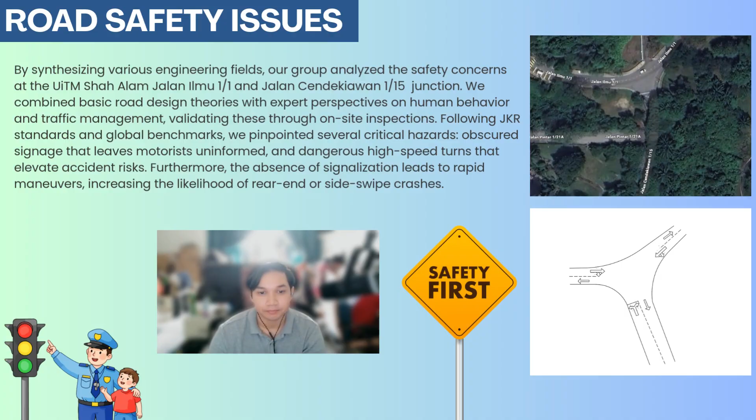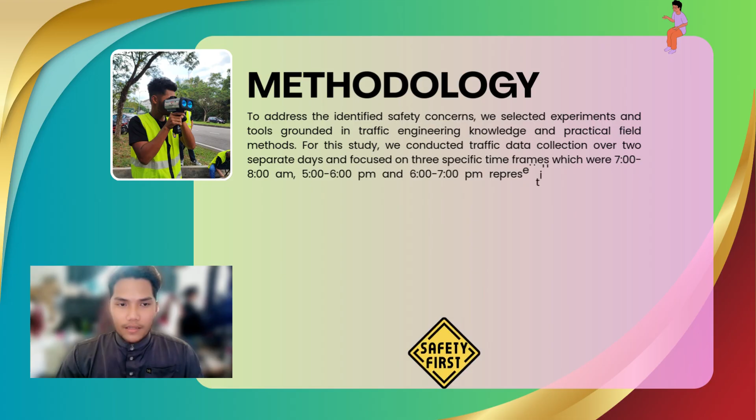Next, I will continue with the methodology of the experiment. To address the identified safety concerns, we selected experiments and tools grounded in traffic engineering knowledge and practical field methods. For this study, we conducted traffic data collection over 2 separate days and focused on 3 specific time frames, which were 7 a.m. until 8 a.m., 5 p.m. until 6 p.m., and 6 p.m. until 7 p.m., representing morning peak, evening peak, and night condition.

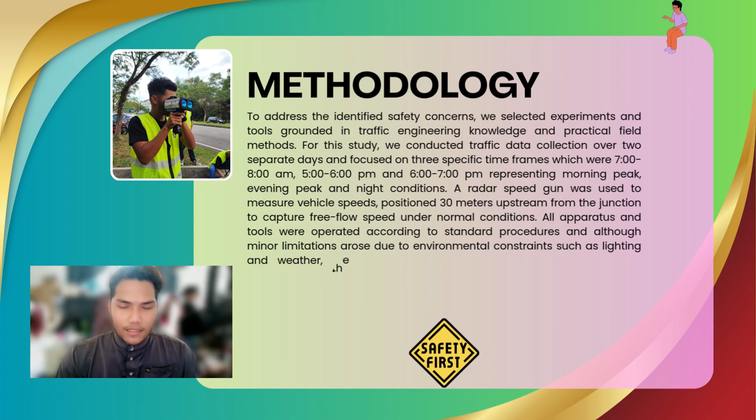A radar speed gun was used to measure vehicle speeds, positioned 30 meters upstream from the junction to capture free flow speed under normal conditions. All the apparatus and tools were operated according to the standard procedures, and although minor limitations arose due to environmental constraints such as lighting and weather, the majority of the data collection followed proper methodology. Our tool selection was based on established engineering practices and supporting literature, and the resulting data was deemed reliable for further analysis and drawing valid conclusions.

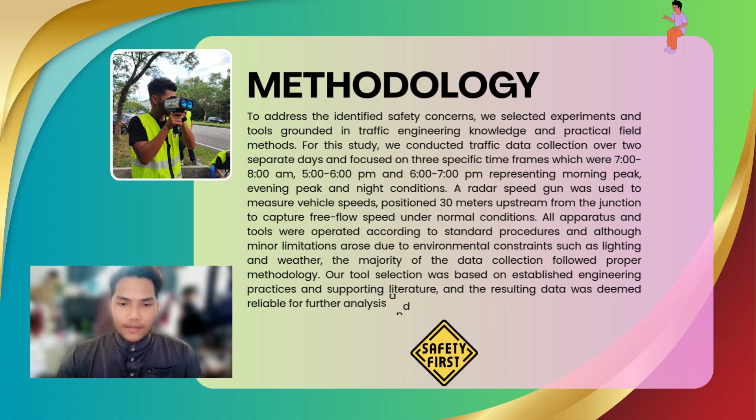For this study, we conducted traffic data collection over 2 separate days, focusing on 3 specific time frames: 7 to 8 a.m. morning peak, 5 to 6 p.m. evening peak, and 6 to 7 night condition. For the morning peak, we get an average speed of 23.9 kilometers per hour. Evening peak, we get an average speed of 25.56 km per hour, and night peak average speed of 25.29 km per hour. So the total average speed is 25 km per hour.

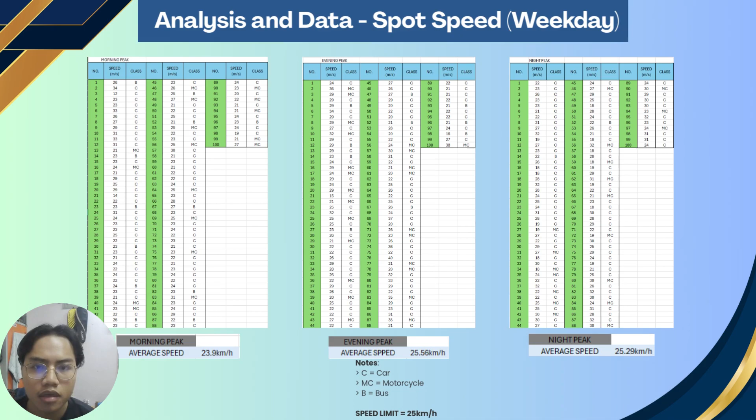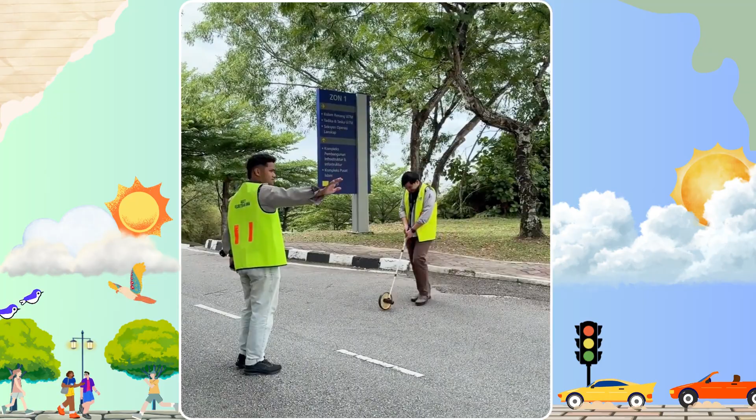We have chosen a T-junction road at Bukit Tonggak. Without a traffic signal, the crossroad becomes a place of high confusion, with vehicles from all directions competing for right of way, increasing the probability of rear-end and angle crashes. Each lane will be measured using a proper measuring wheel to meet the JKR geometric design standard, to ensure the safety of the road using proper material. This is to ensure the safety and efficiency of traffic flow.

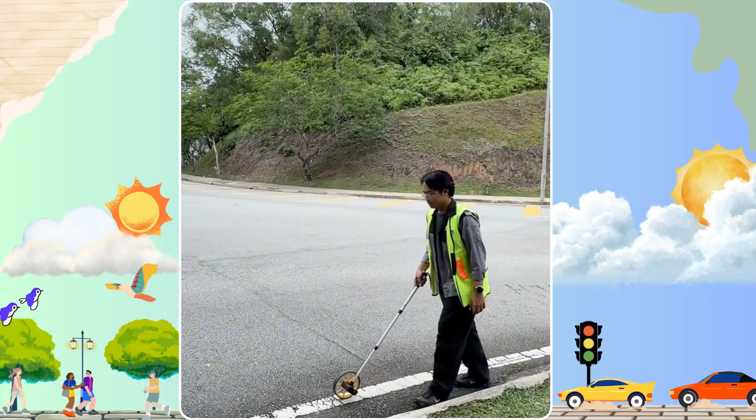We observe there is no zebra crossing line to cross the road. So we decided that we need to create a zebra crossing line on the road to ensure the safety of pedestrians crossing the road. The zebra crossing line should be placed a few meters from the intersection point. This allows pedestrians to walk safely across the road using the zebra crossing line, following the JKR standard. This is following a minimum setback of 5 meters from the corner.

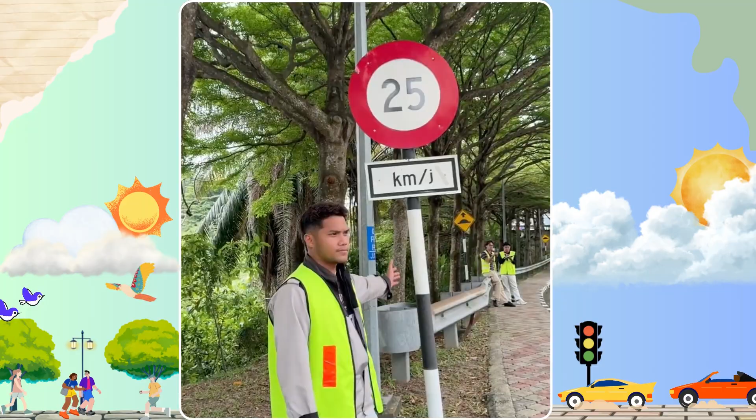We observe there is a speed limit at the junction, and there is also a slope sign to slow down vehicles along the junction. There is also a slippery road warning sign to ensure the safety of vehicles using the junction, so it is good for warning vehicles using the road.

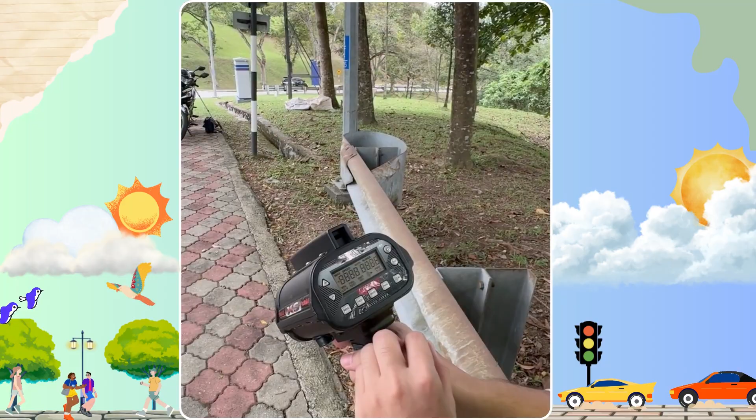For this study, we conducted traffic data collection over 2 separate days, focusing on 3 specific times: 7 to 8 a.m. morning peak, 5 to 6 p.m. evening peak, and 6 to 7 night condition. A radar speed gun was used to measure vehicle speed, positioned 30 meters upstream from the junction. For traffic volume and classification, we use a manual tally counter to record the number and type of vehicles at 15-minute intervals. This allows us to observe traffic flow fluctuation and analyze speed sub-intervals. Our data collection followed proper methodology, making the results reliable for analysis.

So next we will go to the mitigation part. Based on field observation and speed data collected at the junction of Jalan Ilmu 1/1 and Jalan Cendekia 1/15, several mitigation measures are proposed in accordance with JKR Arahan Teknik Jalan to improve road safety.

So first we'll go to the speeding. Although the speed limit is 25 kilometers per hour, observed evening and night speeds slightly exceeded this value. Speed calming measures such as rumble strips and repeated speed limit signage are recommended to reduce approach speeds.

Next is the alignment. The road alignment allows high-speed turning movements. Chevron signs and clearer edge lines are proposed to improve driver guidance and reduce loss of control risk. Next is the cross-section. The lack of clear road edge definition may encourage faster driving. Painted shoulders and edge markings are recommended to improve lane discipline and speed perception.

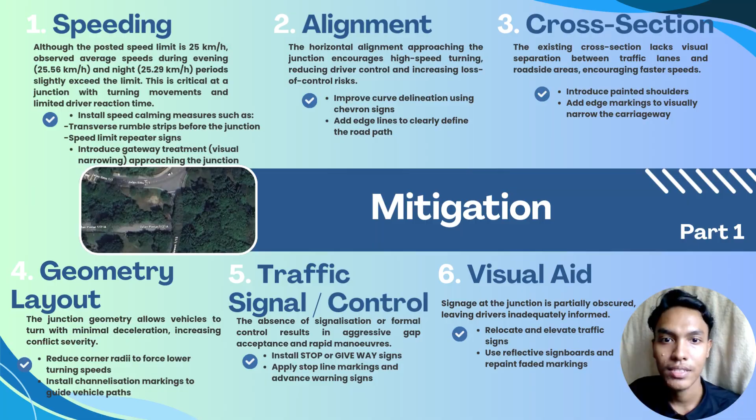Next is the visual aid. Some traffic signs are obscured and road markings are faded. Improving signage visibility and repainting markings will enhance driver awareness, especially at night. Next, we'll go to the next part. Vulnerable road users. As this is a campus environment, pedestrian activity is high. Marked pedestrian crossings and warning signs are proposed to improve pedestrian safety.

Next, roadside safety. Fixed roadside objects near the junction increase injury severity. Removing or shielding these obstacles will create a more forgiving roadside environment. Next, we go to street lighting. Limited nighttime visibility was observed. Improving street lighting at the junction will enhance driver perception and reaction time. Next is landscaping. Vegetation near the junction restricts sight distance. Regular trimming is recommended to maintain clear visibility in line with JKR requirements.

Lastly, we will go to the road surface. Worn pavement and faded markings reduce skid resistance. Resurfacing and repainting road markings are recommended to improve braking and guidance. Overall, these mitigation measures collectively improve speed control, visibility, and junction safety, contributing to a safer road environment within the UiTM campus.

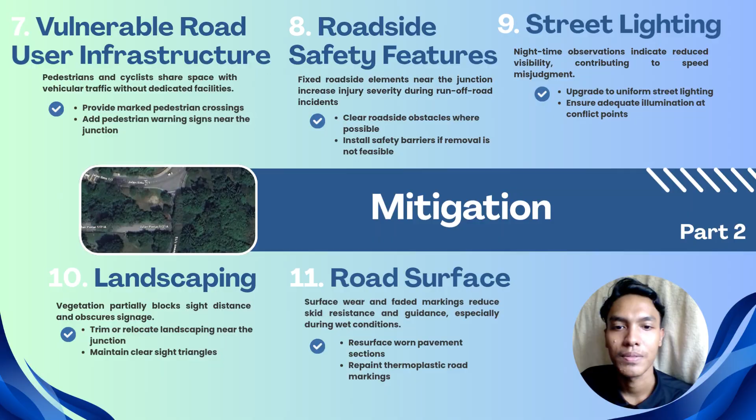Okay, now we move to the conclusion. The safety study at Jalan Ilmu 1/1 and Jalan Cendekia 1/15 in UiTM Shah Alam has identified many issues. From the site visit, the busy spot has a big risk for users and vehicles. A main obstacle is the lack of basic signage, making the path tough to use. Speed is the big concern for this safety audit. We can see vehicles moving so fast when the lanes are empty. Since no bump exists to slow them down, this has made accidents likely.

Additionally, the spot lacks a painted walk path. This is so unsafe for the users as people have no safe zone to walk. To fix this, we suggest adding roadside signs to guide each user. Speed bumps or caution signs should also exist to make people slow the vehicles down. Lastly, adding a white walk path is vital to give a safe zone to the users.

For the final, fixing signs, slowing down the vehicles and adding the walk path will help. This simple change will make the junction much safer for all the students and users. That's all for the conclusion.